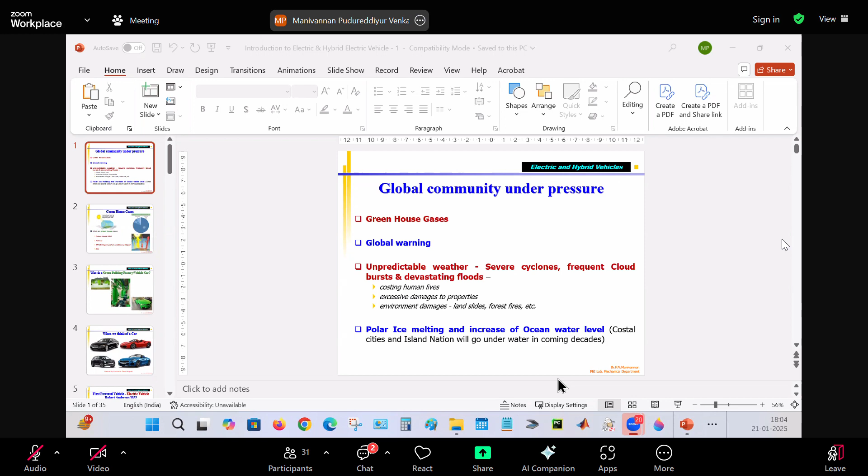Global community under pressure. Yes. Okay, I think you can see this was yesterday. It just started, just 2 slides only yesterday. We are talking in general. What are the issues with global warming, greenhouse gases? We have talked about it yesterday.

Okay, so already I told you that the greenhouse gas is a major issue, which is actually destroying the Earth's atmosphere. They say that if you don't control the greenhouse gas emission, the average temperature may increase, summer will become hot, all those things. So because of that, people, animals, plants can go extinct once and for all, correct? That can happen. Like dinosaurs, the same thing can happen.

But this is a slow process. We know that for the dinosaurs, it is only an argument or partial proof. Some meteorite, a big one, came and hit the Earth near Mexico in the Atlantic Ocean. And it created so much dust, all those things. They covered the entire Earth's atmosphere so that the sunlight could not reach the Earth's surface.

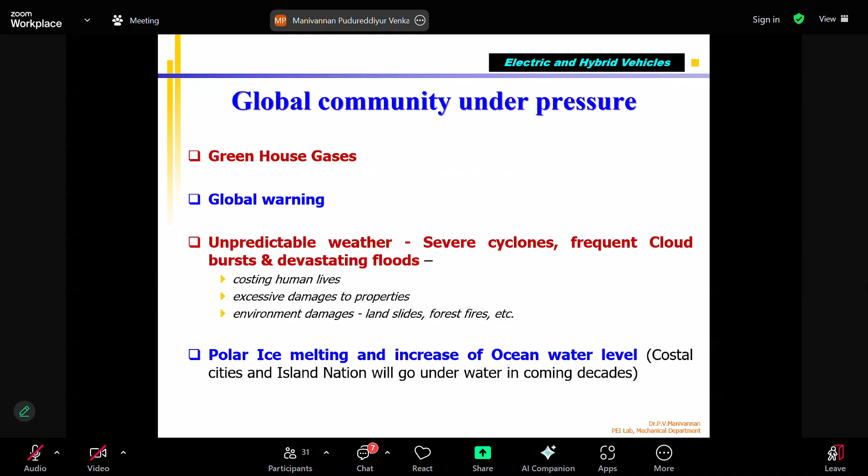So that means photosynthesis is not possible, the plants will die. No fruits, no vegetables, nothing. Animals cannot eat, and similarly birds, everything went extinct. They say one of the reasons for the dinosaurs 65 million years ago is the asteroid hitting, right? A big asteroid measuring a few kilometers in size. Like that, the Ice Age came. And they say now humans are creating their own destruction. Right? So that is why so many meetings, new technologies are coming.

Okay. Now, yesterday I explained about greenhouse gas. Primarily our interest is reducing the carbon dioxide production or emission from the tailpipe, which was supposed to be an inert gas. Right? It was called an inert gas. That's why, as I told you many times, we drink soda, which is water plus some minerals, some sweetener plus carbon dioxide gas. It helps you feel good. It helps in digestion. Correct? That gas may be inert, but it is a greenhouse gas, which is slowly increasing the average temperature. That should be avoided.

Okay. Apart from that, other gases also: fridges, AC, all those things, CFC gases are already banned. Alternate gases are used in the refrigerants. Of course, NOx production is also coming from the engines, from combustion of hydrocarbon fuel. But please know the fuel doesn't contain nitrogen. But if combustion temperature goes above 1000 degrees, the oxygen in the air inside the combustion along with the nitrogen, an inert gas, can combine, correct? At low temperature it is inert, but at higher temperature it can combine with oxygen and produce NOx, NO2, what we call nitric oxides. And if they mix with water,

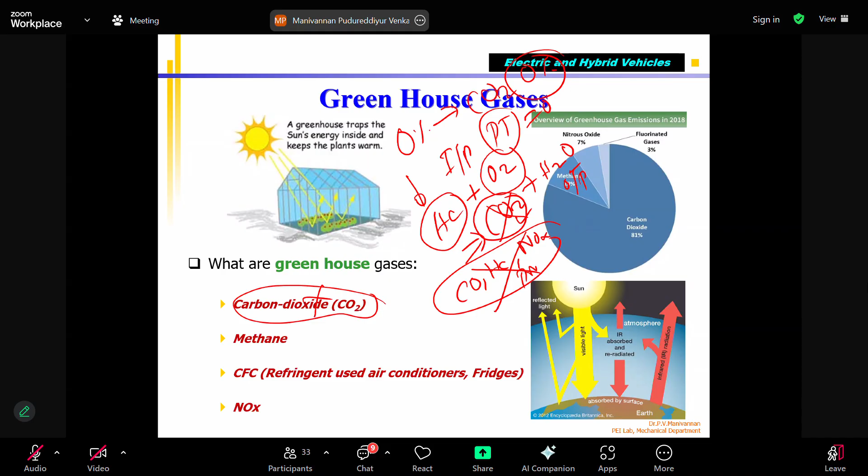No fuel means no combustion in the engine, no heat, no pressure generated, no movement of the crankshaft, no torque. So nothing happens. Energy is not produced. So in an IC engine, it is impossible to stop using fuel. Without fuel, the engine won't work.

As I told you yesterday also, suddenly without the IC engine, you cannot do anything. Whether in industry, transportation, airplanes, ships, wherever you are doing combustion, engines are there. Maybe they are LPG based engines, gas fuel, or jet engines. You are going to burn fuel, hydrocarbon.

So the only way you can reduce the amount of CO2 produced, if you still want to use the IC engine, is making the engine more efficient. That means with less fuel burned, less CO2 will come, but still you get sufficient torque and power so that your vehicle is able to transport goods, passengers, whatever it is.

So for the last 30 years, a main group of engineers, researchers, and automobile companies have been working on increasing the efficiency of the IC engine or jet engine. We know that without that, there's no possibility of doing any work. So they're doing research. We are trying to improve the thermal efficiency. Thermal efficiency has a limitation, only a certain percent.

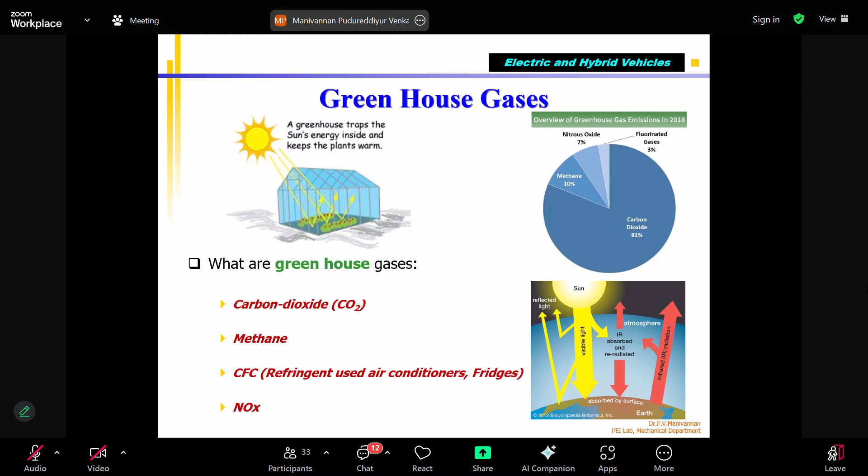So if you use an electric motor to generate mechanical torque and power or energy to do any task, whether to drive your motorcycle, car, truck, bus, ship, or aeroplane, instead of a jet engine, use an electric motor for driving propellers, then the efficiency is very high. And apart from that, CO2 is zero because you are using electrical energy. Input is current and voltage.

In a lighter sense, take a building and paint it green. It is not a green building. Similarly, take a factory and paint all the machines inside green. It is not a green factory. Similarly, take a sports car, a Ferrari or something like that. You know the fuel efficiency of a sports car is very bad. Per liter it may give 1 to 4 kilometers, but they produce 800 HP, 1000 HP, 300 or 350 kilometers per hour. They are meant for higher acceleration, quicker response.

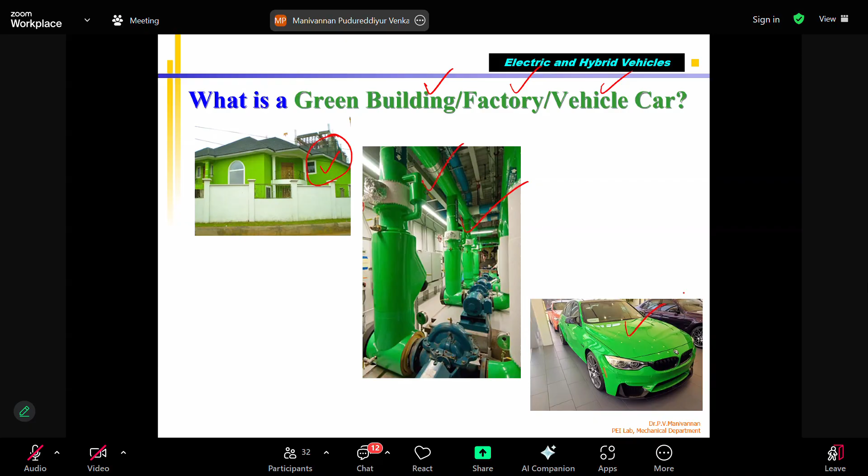But green car cannot be achieved overnight, that's why we have different steps. When you think about a car, we automatically think about this. I took some pictures from the internet showing sports cars, SUVs, regular cars, race cars, all those things.

They are all powered by IC engine, petrol or diesel engine only. Power may range from small cars with maybe 30 to 40 bhp, to race cars and sports cars up to 800 to 1,000 bhp, with different shapes and luxury, but they're all IC engine based.

So these cars cannot be considered green cars. If you drive a car with maximum fuel efficiency, even if it gives 100 kilometers per liter, you are still burning petrol or diesel and automatically producing CO2, adding to the atmosphere. So atmospheric temperature increases, causing global warming and the greenhouse effect. You cannot avoid it.

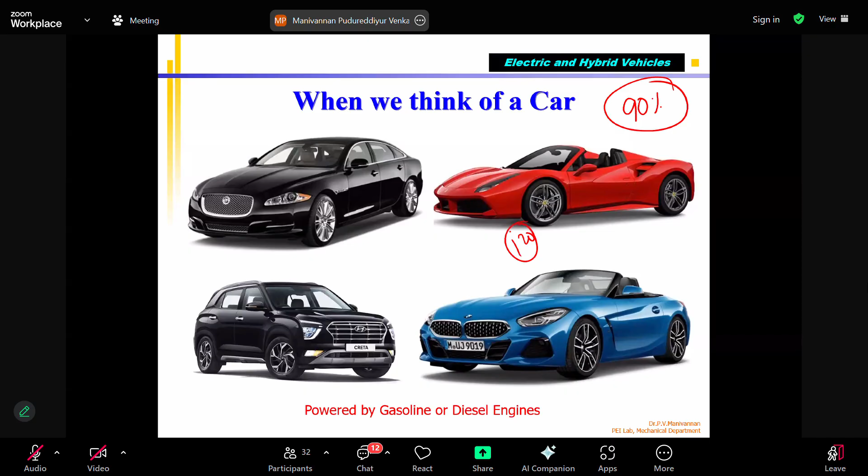As I told you, the engine was invented only 100 to 120 years ago. Before that, for thousands of years, people used animals like bulls, horses, donkeys, and mules for transporting goods and people from one location to another. That was the primary transportation some 5,000 years ago.

After that, they invented chariots and bullock carts, driven by bulls, cows, or other animals, and horse-driven carts. Chariots were used for transporting people faster, and also for military purposes. Chariots were part of the military, along with horses, elephants, and foot soldiers. These were in use for at least 3,000 to 4,000 years.

This continued up to at least 120 to 150 years ago. Then came the invention of the petrol and diesel engine, which gave us airplanes, tanks, and all the mobile vehicles used in the army, as well as civilian vehicles like cars and trucks.

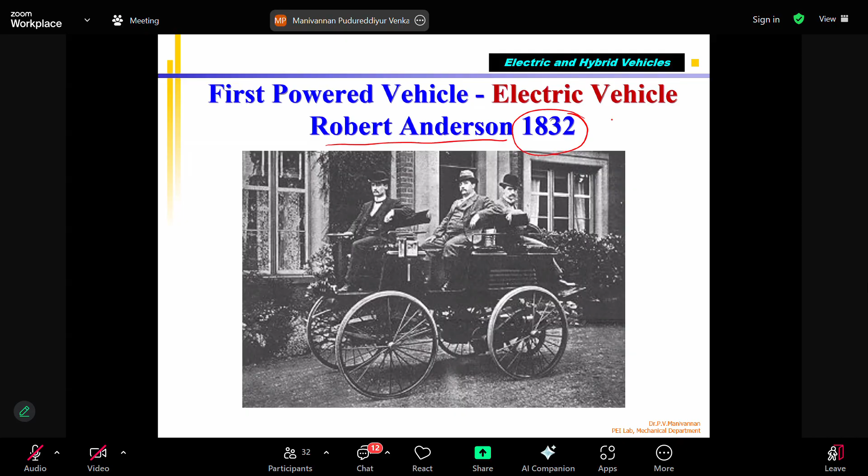But before that, as I told you yesterday, in 1832 itself they made a powered vehicle which was an electric vehicle, developed by Robert Anderson. He is sitting with his friends on his car. Please note that the first automobiles were not IC engine based—it was an electric vehicle, starting in the 1830s, 1850s, something like that.

Then the hybrid car came. Now we talk about hybrid cars as if they are the latest innovation, but please understand all these things were tried long before, 50, 70, even 100 years ago. Porsche, one of the leading sports car manufacturers in Europe, developed a hybrid car with an electric motor combined with an engine. Then came the Ford Model T. All this was happening in the early 1900s, 1920s, 1950s.

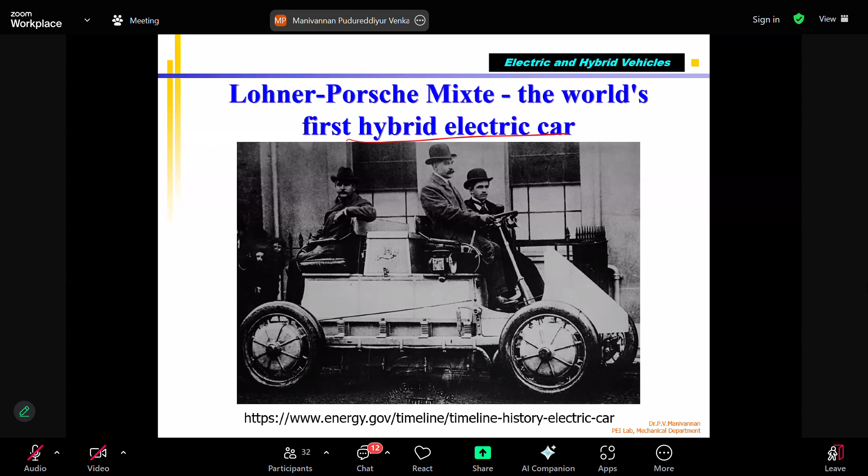But the invention of the petrol and diesel engine required getting crude oil—extracting it from below the earth, maybe 1 or 2 kilometers down, drilling and getting the crude oil, then extracting diesel and petrol from it, which was very tedious. That technology was not available then, and people did not even know crude oil was there below the earth's surface.

Crude oil was first discovered, if I'm correct, in Pennsylvania, USA, around 150 to 200 years ago. It was oozing out like a thick black oil in a desert or forest. People found that it was combustible. Later, around 150 years ago, the British found crude oil in Iraq as well, since Iraq was under British rule like India.

From there, they developed cracking technology and the petrochemical industry slowly came into being, with production of diesel and drilling. They found oil in many places—the Middle East, the US, Russia, and in India too, like Digboi in Assam, which we are still finding today. So production of crude oil, and from that petrol and diesel, came about.

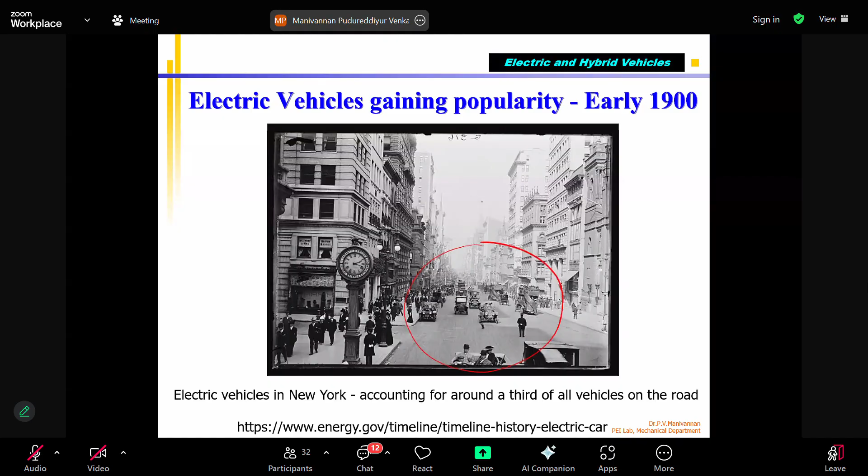So the engine was also invented. The electric vehicle, which started in 1832, eventually became a petrol-engine based Model T. There were more than 20 to 30 companies—in Europe, Mercedes-Benz, Citroen, and Fiat, all over 100 years old, started in Europe.

Similarly, in the US, Ford started the very famous Model T, which is a gasoline engine car. It was very popular from 1908 to 1912, and even now, if you have one, you can sell it for a huge amount.

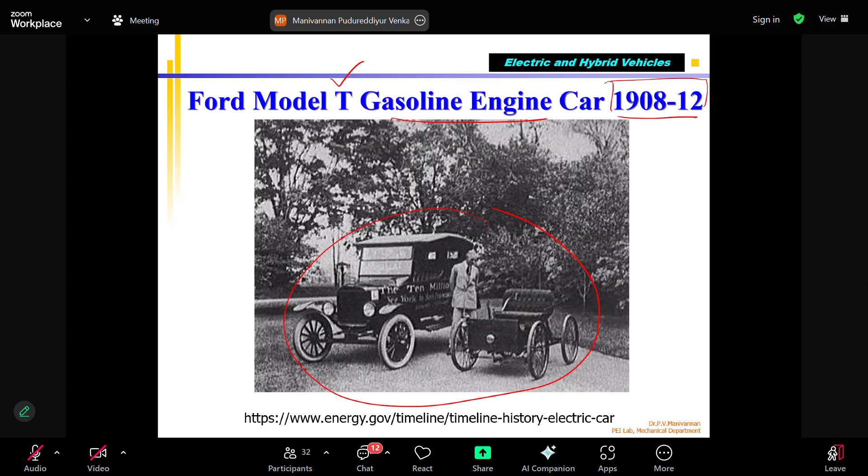So this is what I call the penetration of the IC engine inside the automobile—the original automobile was an electric vehicle, which became IC engine based. Here I'm talking about 1900, around 1970 or '71, when NASA's Apollo missions went to space.

Armstrong, Neil Armstrong, along with one more astronaut, landed on the moon. They walked, correct? But first, the Apollo missions started, I think, from 1 to 17. Apollo 1, 2, 3, 4, like that came. Apollo 11 was the first one that landed on the moon, Armstrong. Apollo 17 is the last one, if I'm correct. Last Apollo mission was 17.

In 1969, I think, July something, Armstrong landed. Then subsequently, another 2 years, 7 more missions went up to Apollo 17. One mission failed, if I'm correct, Apollo 13. They went near the moon but could not land. There was a big accident, but they safely returned. Apollo 13, but otherwise, each time 2 people went.

In one mission, they took a land rover because they wanted to travel, since you cannot walk much on the moon because of the limited amount of time you can stay. In a short duration, if you want to survey and look for material, you need to do it on the run. So you need a vehicle.

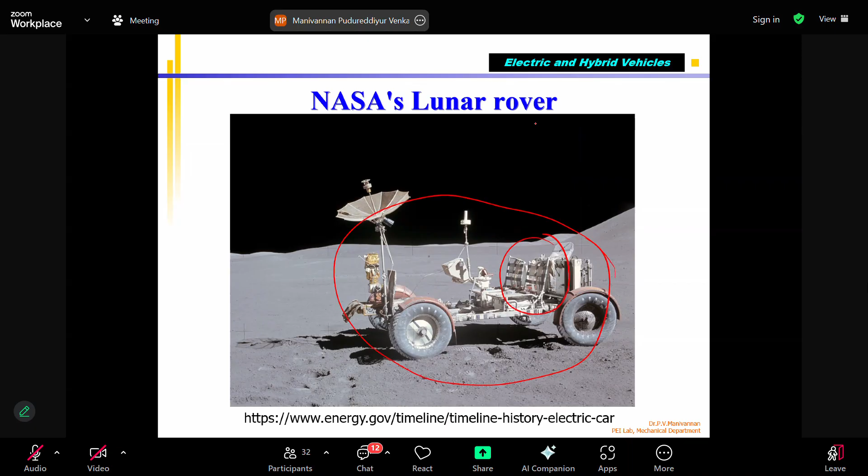That was also an electric vehicle only, because you cannot take liquid fuel there since it would evaporate due to the vacuum. So they used an electric vehicle to travel.

Lithium-ion came only some 20 years ago. Even the concept existed, but it was not commercially available. It had limited performance, and we will talk about that tomorrow.

What is the limitation of electric vehicle? The range - this vehicle could travel some 20-30 kilometers after starting, then the battery discharges. Again you have to charge your lead acid battery for 10 hours, then you will travel another 20-30 kilometers and stop. The weight to power density of the battery was very bad, very low percentage, 10%, 12%. Because of all these things, GM said electric vehicles will not come - it's not feasible compared to IC engine based vehicles. That's what they were saying.

So even though they tried, other companies also tried. I'm giving one example, General Motors 1973, something they tried like that. Other companies tried, then they abandoned it. Okay, but that's not our interest.

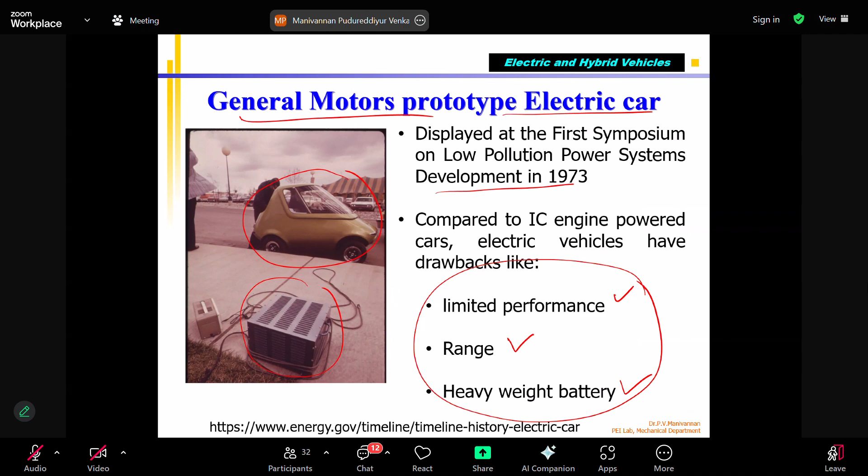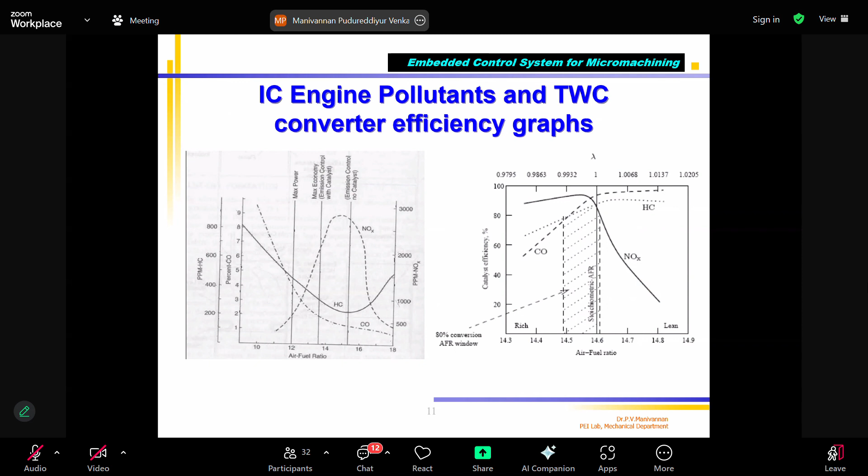Since all this happened in the 1970s, one way is to improve. We want to reduce CO2 production, which means you have to improve the efficiency of the engine, apart from reducing - already we talked about this in the previous class, when I talked about IC engine for the introduction of autonomous vehicle. But just to quickly go through, we try to develop new technologies to reduce fuel consumption. Reducing fuel consumption means the amount of CO2 produced is also reduced - lesser the fuel, lesser the CO2.

But you want to get maximum torque, maximum power. We know that in a petrol engine, the torque produced by the engine is directly proportional to air-fuel ratio and spark timing. The best thermal efficiency is obtained in a petrol engine when air-fuel ratio is around 1.1, slightly leaner than stoichiometric - not exactly stoichiometric. Slightly leaner, thermal efficiency in a petrol engine is maximum, around 15 or something like that.

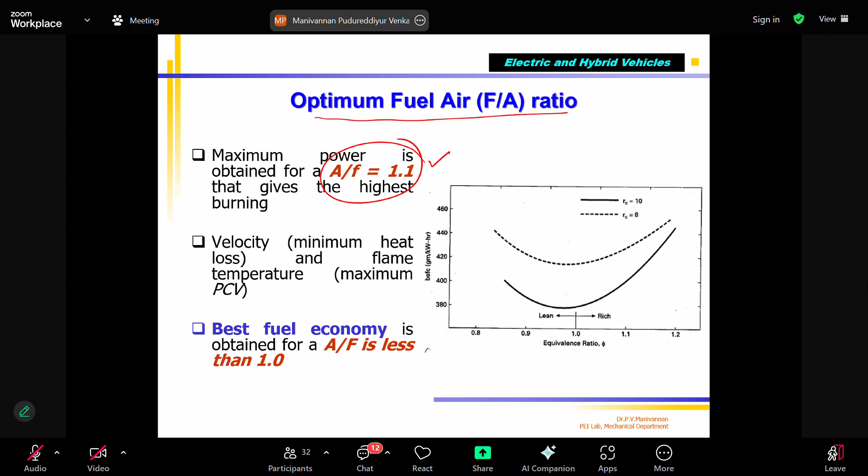Okay, so this graph shows that. The next thing is, if you talk about SI engine or petrol engine, the torque T is proportional to AFR and spark timing. Spark timing we call theta - when you give the start of combustion, or when you give the spark. We know that from TDC, it can be advanced or retarded.

That's what you are talking about. Depending on engine speed, you change when the spark is given - 10 degrees before TDC, 20 degrees, 30 degrees, or 35 degrees, you will vary. So as a control engineer, the SI engine's torque, speed and power can be controlled by varying the air-fuel ratio and the spark timing. If you vary these two, the indicated mean effective pressure, or final shaft power, can be controlled. So this is one thing.

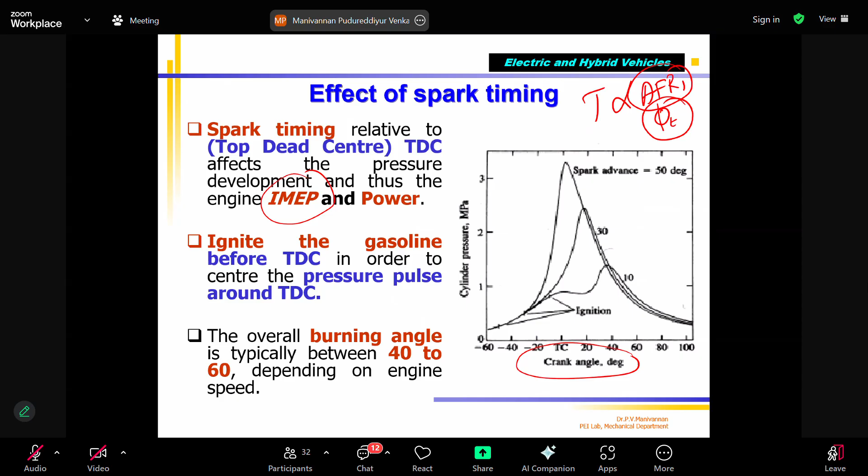So all the research going on in IC engine labs, universities, and industry is trying to play with these two parameters, air-fuel ratio and spark timing, to make the engine produce maximum torque with minimal fuel, so that CO2 emission reduces, apart from reducing CO, HC and NOx. We also talk about maximum brake torque, which happens only at a particular spark timing in a petrol engine.

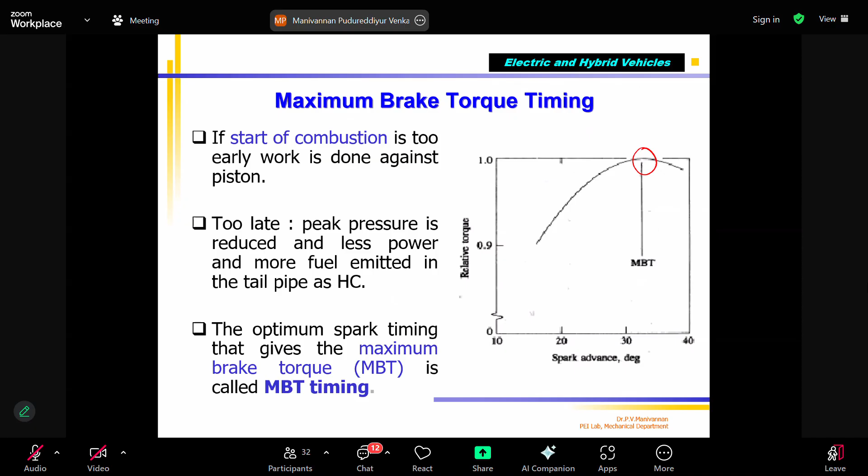So again, this will be electronically controlled - electronic spark timing control, electronic air-fuel ratio control. People have developed different types of advanced fuel injection systems. We already know fuel injection is better than carburetor-based fuel metering. The carburetor cannot achieve the level of fuel control needed for proper combustion, so CO, HC, NOx and thermal efficiency are all affected.

That improvement is possible only with a fuel injection system. For perfect combustion, the liquid fuel should evaporate and become gas before or during combustion start, so all fuel will be burned. If all fuel is burned, I get maximum torque, and wastage of fuel is reduced, so CO2 emission is reduced. So different fuel injection techniques were used in diesel and petrol engines.

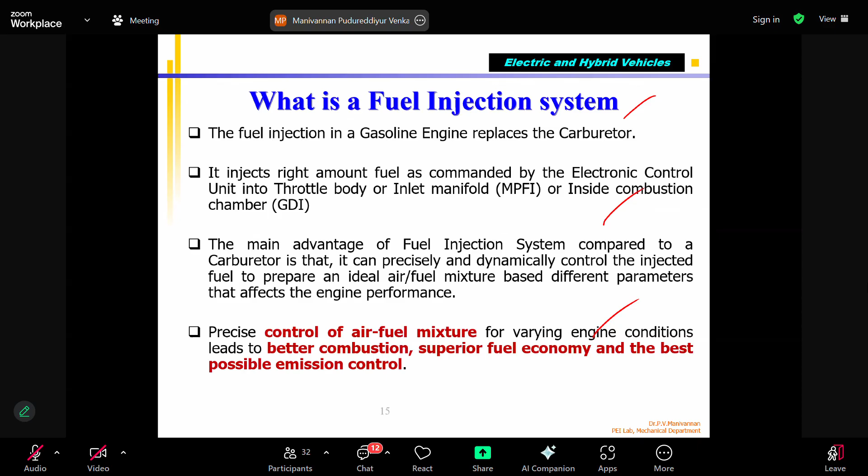We know that spraying fuel improves fuel vaporization. If fuel vaporizes, creating a homogeneous air-fuel ratio, the fuel vapor easily mixes with air and gets close to oxygen molecules. So all the fuel molecules get converted into CO2 and H2O, producing maximum heat, maximum pressure, and maximum thermal efficiency. Vapor is very important, and that's achieved by using fuel injection instead of carburetor.

Spraying also makes cold start easier. All these things are much better in fuel injection compared to carburetor. Otherwise, you have to use the choke. We know that on motorcycles...

I had a motorcycle, drove it for 20-25 years. In winter at IIT, in the early morning the temperature would be 18-20 degrees in December. I had to go kick-start my motorcycle because there was no starting motor - 10 times, 20 times, sometimes my leg would pain. I would put the choke, still it wouldn't start. Sometimes it was because of the extreme cold. In Chennai itself it's like that - think about going to Kashmir, North India, or cold countries like European countries, US, Japan.

It is very difficult in such cold conditions. So the fuel injection system can automatically adjust the air-fuel ratio without a choke - they call it electronic choke, which injects more fuel as needed. So fuel injection helps in cold start, and better mixing happens because the fuel is already vaporized due to the fine spray.

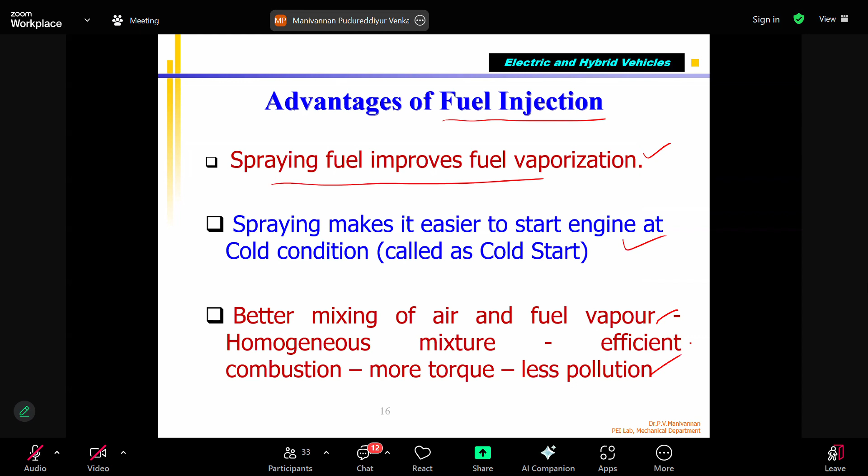So three types of fuel injection did not come overnight. Currently we are going to GDI engines, the latest one. The first was throttle body injection, meaning that even in a multi-cylinder engine, only one injector will be there in the plenum. At the main throttle body, there will be one big injector. It will inject all the fuel - for example, in a 4-cylinder engine, it will inject the fuel necessary for all 4 cylinders at one location.

When air moves, the air is set, and the vapor will mix with it and go to individual cylinders. But the main problem with throttle body, a single point injection in a multi-cylinder engine, is mal-distribution of the air-fuel ratio.

For example, I have 4 cylinders like this. The piston is going, and I inject the fuel here at the central body. Air is coming in, and when I inject, the fuel vapor is concentrated here - you can see this area will be rich. So when air enters and the piston goes down, this cylinder will get less fuel vapor and more air. But when the next cylinder goes, more fuel will come because the fuel vapor is very close. So these 2 cylinders will get more fuel vapor compared to the last 2 cylinders.

This is called central body or throttle body injection. This came about 50 years ago. Then they called it the mal-distribution of the air-fuel ratio problem.

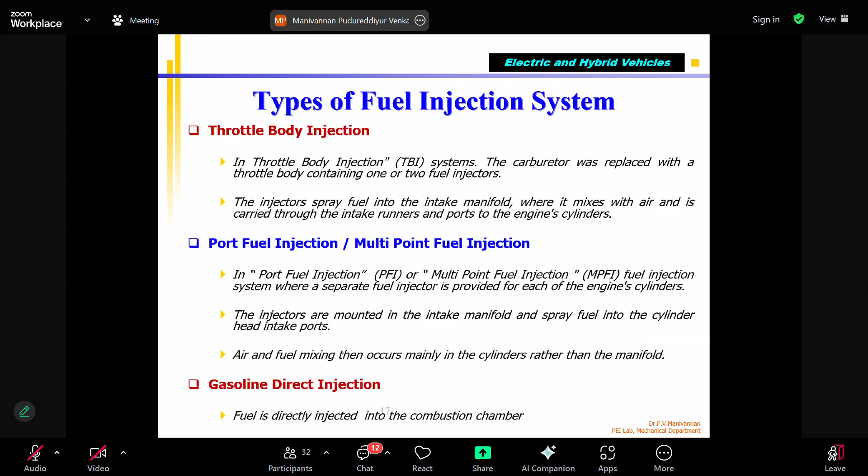We already discussed this in the previous course, but we are still talking about it because the whole idea with electric hybrid vehicles is reducing fuel consumption, right? Reducing fuel consumption as much as possible, but we cannot make it zero. If there's no fuel, the engine will not work. So that means you still need it. But right now, in one step, you cannot go straight to an electric vehicle. There are limitations which we will see in the next class.

So we know that for port fuel injection with a single cylinder, like a motorcycle, there's only one cylinder. I'm injecting fuel, so some amount of fuel is sticking here, that is called wall wetting. It is a liquid fuel, it is sticking. Majority of the fuel goes inside the combustion chamber along with the air, but some remains stuck, so that fuel is wasted. Because the air-fuel ratio is not maintained, CO, HC emissions, all this happens.

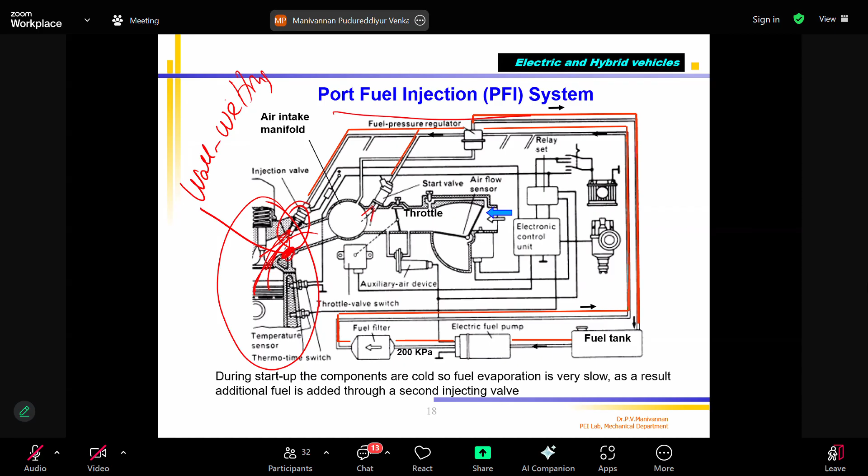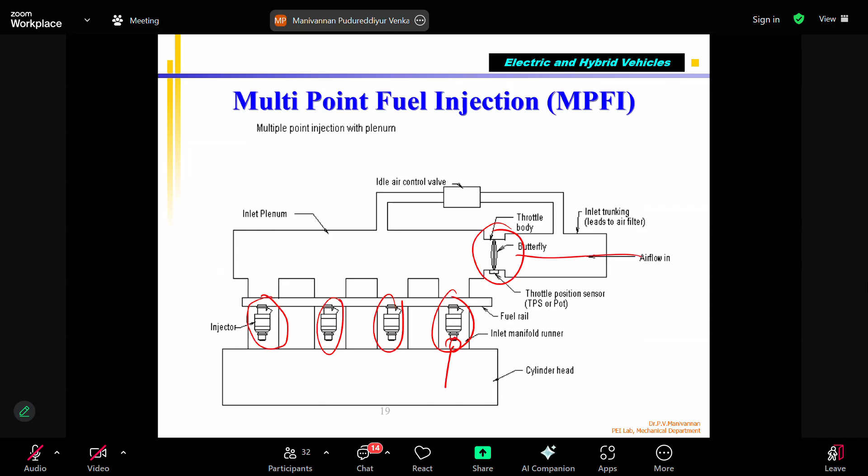Next is gasoline direct injection, GDI. The advantage is that fuel is directly injected inside the combustion chamber. High pressure is generally needed, around 5 to 10 MPa or 15 MPa for injection, but sometimes even a little higher. Different companies use different pressures in GDI fuel injection. Don't assume it's always 5 or 10, some companies use 15, 18, or 20 MPa. It varies, but the advantage remains direct fuel injection.

Then there's the top of the piston, called the bowl of the piston. Its shape is also very important for the gasoline injection direction. The fuel and air should circulate like a tornado or cyclone, so that the injected fuel evaporates and mixes uniformly inside the GDI engine. It works on both stratified and homogeneous combustion modes.

Yes, sir. Anand sir, yeah, that's right. So you would have talked.

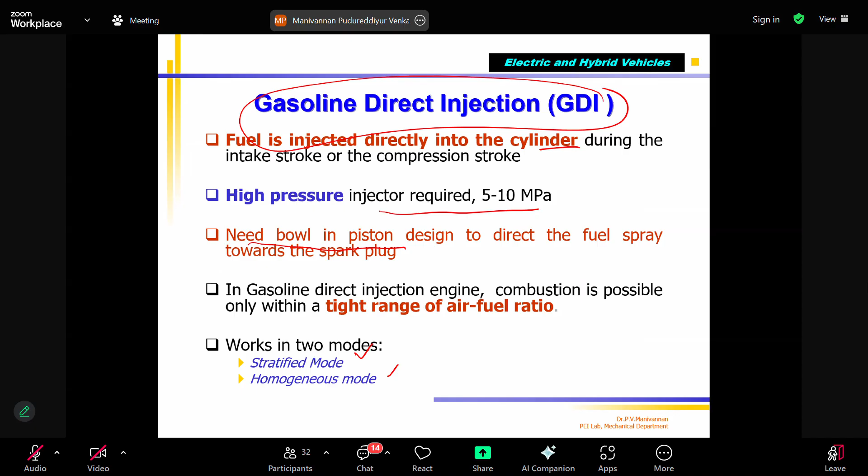So all those things. So it works in homogeneous and stratified modes, and all this is to improve the engine efficiency, so that the use of the fuel can be reduced to get the same mileage, same torque, same power. So CO2 production is reduced. So this is what I told you.

Stratified means the injector itself, the spray pattern changes. In a GDI engine, if I want to run the engine in stratified mode, the injector will spray fuel such that it goes, you can see this is a bowl shape, it is not a flat surface. You can see the air comes in. This is the air inlet. The air comes in, hits, and circulates inside.

There is a swirling action created by the shape of the inlet port under the plenum and also the bowl shape. Now fuel is injected. Injected fuel will go near the spark plug. Because you are in stratified mode, you are injecting less fuel. That fuel should vaporize and go near the spark plug. When your spark is given, it should ignite.

If the air fuel ratio is very lean near the spark plug, even if you give a spark, misfire will happen, combustion will not start. So in stratified mode, it is very important that the injected small quantity of fuel should be directed by the air and go near the spark plug. Then you give the spark. So that is stratified.

The advantage is you can inject less fuel. You can operate in lean mode. You can get more mileage in stratified mode. The fuel is injected, but once the combustion starts, it mixes automatically. Maybe 24:1, 22:1, you can run your petrol engine and get maximum mileage.

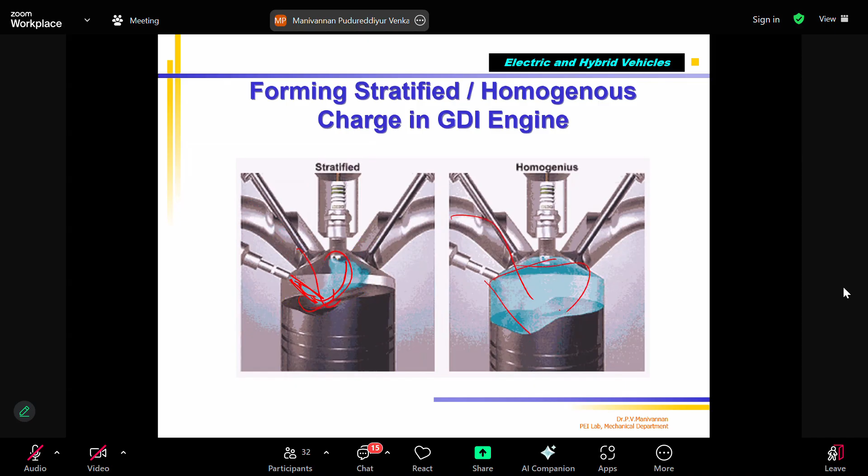This is deflected by the piston top, which is shaped, and the air is also coming in and it mixes. Here you inject a wider spray, and of course air is coming, it mixes homogeneously. For more power and acceleration you run a homogeneous mixture, and stratified mode for light load or more mileage. So these are done to get the maximum engine efficiency.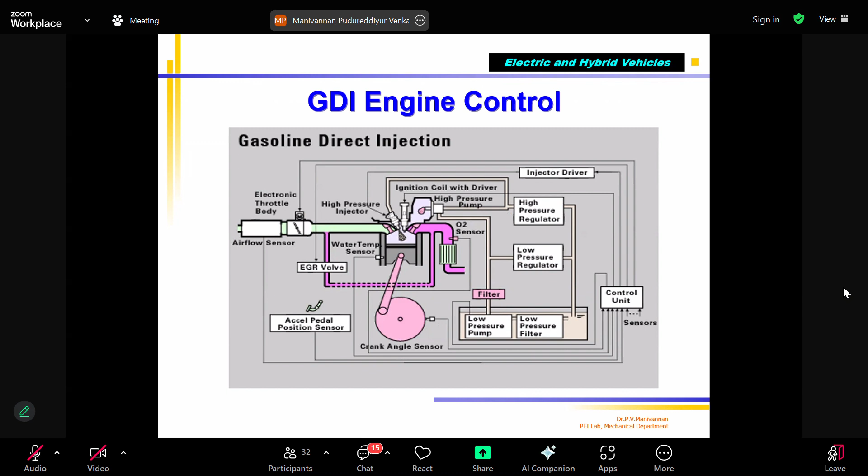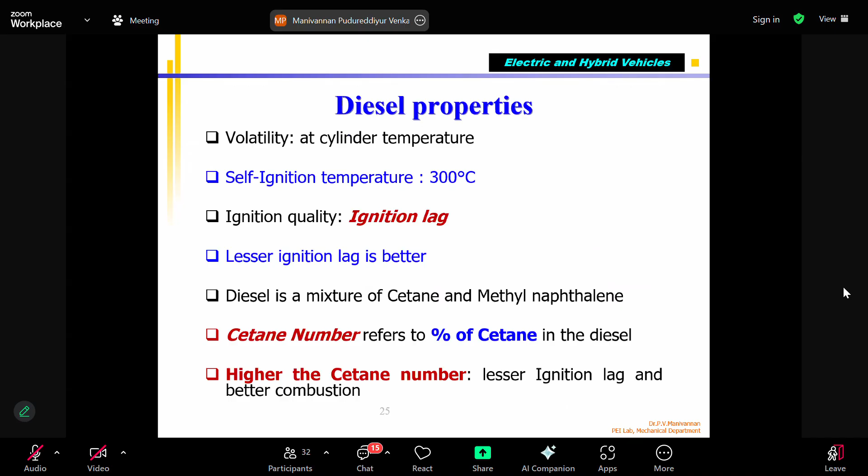So CO2 is produced. Again, the whole idea is getting rid of CO2. How? By different technology. That's why I'm talking. Diesel engine, you already know about it. In the diesel engine also, NOx is produced, particulate matter is produced, some fuel comes out partially burned, we call it particulate. To improve it, like MPFI or GDI, they have CRDI, Common Rail Direct Injection System.

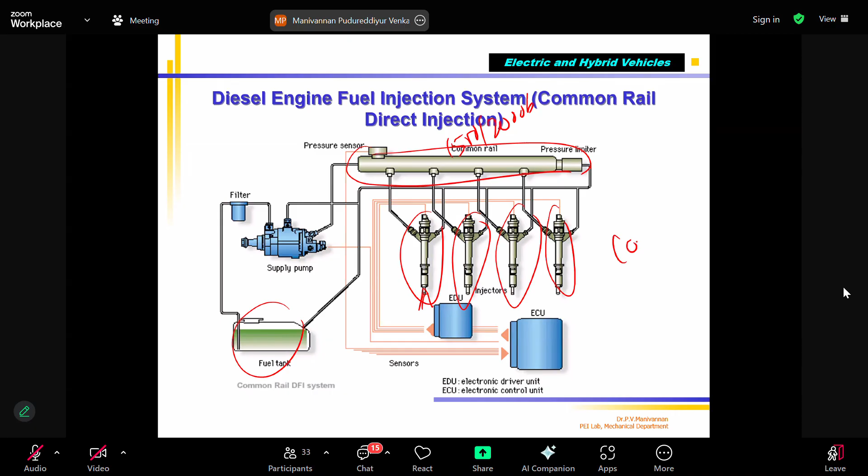The fuel is pressurized to 1500 bar to 2000 bar and stored in a common rail. There's an ECU. The ECU will open the injector in each cylinder, 4 cylinders, diesel injectors, high pressure. They inject the fuel at high pressure, so the fuel droplet size becomes very small, maybe 50 micrometers, easily evaporates, and combustion noise reduces.

The main advantage of diesel injection is the combustion rate is controlled by the injector: injection rate, spray angle, injection pressure, nozzle size, shape of the spray. All these determine the combustion curve, along with the chamber shape and mixture motion, turbulence, that is how you design the piston crown shape. And torque output is controlled by the amount of fuel injected.

Then the main point is atomization. The smaller the droplets, the more easily they evaporate and burn, producing less particulate matter. More torque you get. Combustion temperature should be controlled to reduce NOx emission. We know that if temperature goes beyond 1000 degrees centigrade, NOx is produced.

So whether petrol engine or diesel engine, you have to control combustion temperature, but in the diesel engine it is predominant. Compared to the petrol engine, NOx emission is very high in the diesel engine because diesel combustion produces more heat. So that needs to be controlled. Of course, if NOx comes, what do you do? You use SCR, by urea injection in the exhaust pipe.

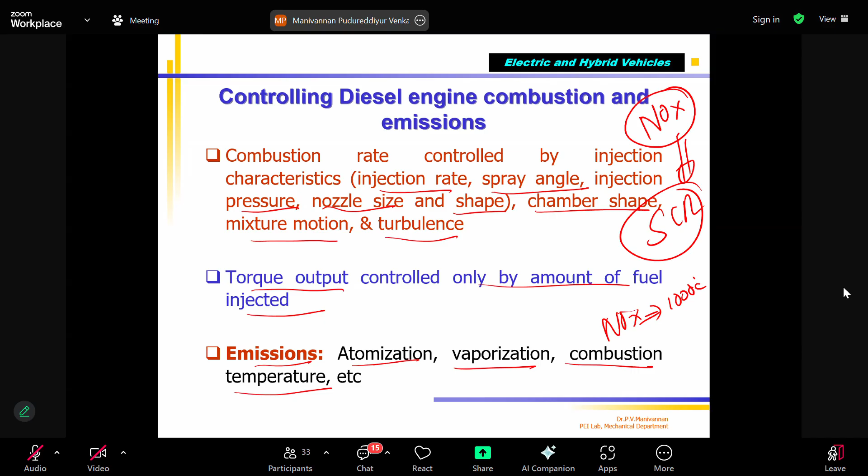So that the nitric oxide is converted back into nitrogen, correct? So that's what you do. There's an ECU, multiple injection, all those things.

The last engine is called homogeneous charge compression ignition, HCCI combustion. You know that this is a petrol engine, spark ignition. Air-fuel is coming in, you give a spark, combustion happens, and the piston is pushed down. In case of the compression ignition engine, diesel engine, air is sucked in, diesel is sprayed inside, combustion happens, it is pushed down. So here you need a spark plug, you don't need a spark plug here.

And the HCCI engine works similar to a petrol engine as well as a diesel engine. They call it cold combustion. I think the Professor would have explained it, so I'm not going to explain. The main advantage of the HCCI engine is less NOx emission; they call it cold combustion. Please note cold combustion is not 0 degrees or minus degrees.

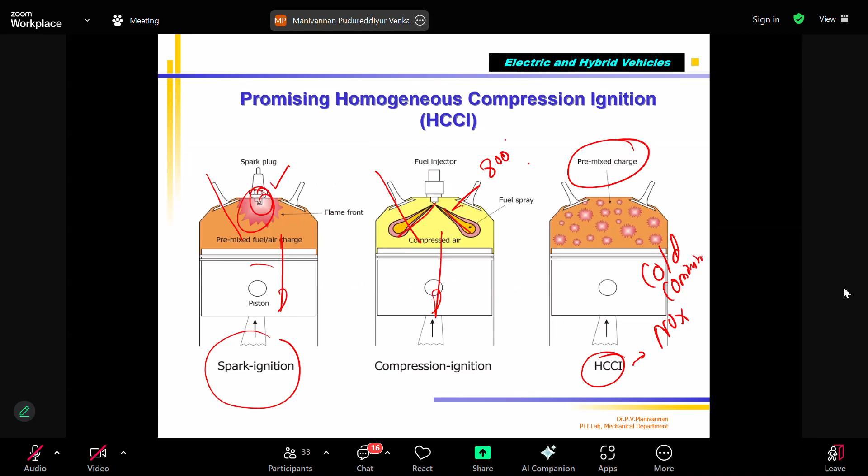See, here the average temperature is 800 degrees; in this combustion it may be around 400 or 450 degrees, lesser. I told you it can go to 800 to 1200 degrees in diesel engine combustion. Here also 800 to 1000 degrees. That's why NOx emission is produced, correct? But cold combustion means even though fuel is burning, the temperature is much lower than in a diesel or petrol engine.

So NOx emission is less, and combustion happens throughout the entire chamber because you are pumping a pre-mixed fuel-air mixture. I mix fuel and air outside and heat it, and the heated mixture is sent inside the combustion chamber. In the HCCI engine, air is sucked in, fuel is mixed, and together they are heated from normal temperature to higher temperature. Then it is sent inside the combustion chamber during the suction stroke.

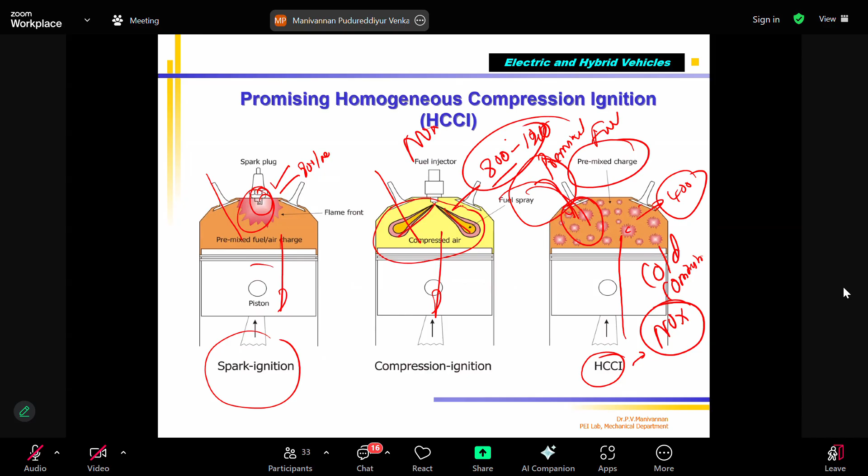After that it is compressed, and because of the higher temperature of the fuel-air mixture, the compression temperature increases; it's already distributed, and combustion happens at multiple points. They call it cold combustion, so the average temperature is much less. So NOx is very low in the HCCI engine, but it needs a very complex control system; it is still under research, not yet commercial. So that is the advantage.

Just one more point. Advantage: it can work at stoichiometry like a petrol engine, in lean mode and stratified mode like a GDI engine, and like a regular SI engine. Stoichiometric, lean, stratified are all petrol engine modes, right? But the fuel is burned without a spark plug. Please note the HCCI engine has no spark plug, like a diesel engine, but you are premixing the fuel; that is an advantage.

With the stoichiometric air-fuel ratio, the major problem is low part load efficiency. Stoichiometric charge condition: low part load efficiency; the benefit is low emissions with the catalytic converter. Lean mode, if you run the same engine in lean mode like an SI engine: reduced pumping work, improved part load efficiency, but NOx emission increases.

If you run the HCCI in stratified mode like a GDI engine, please see it's not a different engine; the same engine can run in different modes. That is the advantage of the HCCI engine. So it becomes very complex to control. GDI itself is very difficult because you need a special injector; a normal injector cannot be used because of the spray pattern.